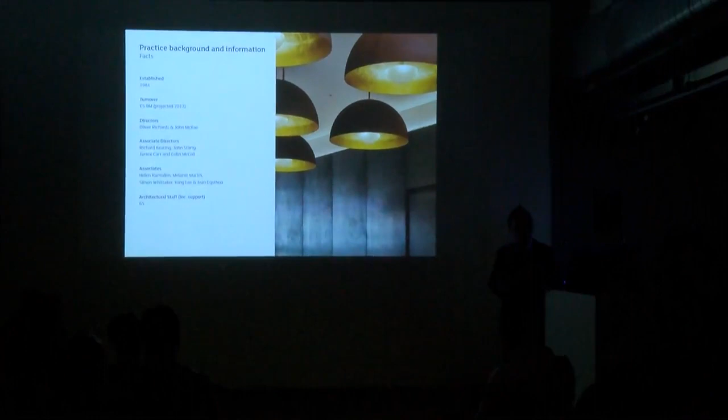Just to give you a bit of background as to who we are - we used to be called ORMS, initials of the founding director, but we rebranded about 3 years ago. We're up to about 65 in terms of size of the practice, which has gone up about 10% in the last 6 months. So we've been fairly busy lately.

In terms of us as a practice, our bottom line is that we create an architecture that listens. When we rebranded and rethought who we are and what we do, one thing that kept coming back was people - how we interact with people, the spaces we create for them, and how important it is as an architect to collaborate with anyone from local communities to the people who make things for you and help you achieve what you need. That's why we think innovation comes from asking the right questions and interacting with the right people.

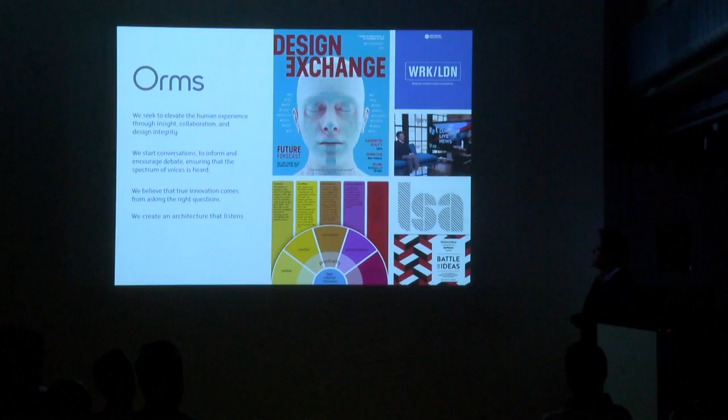As part of what we do as a practice, there are things like the magazine Design Exchange and Lighting magazine, where I sit on the curator's board. We also interact with the London School of Architecture, with feasibilities and research programs with the NLA, and this Saturday I'm doing Battle of Ideas down at the Barbican.

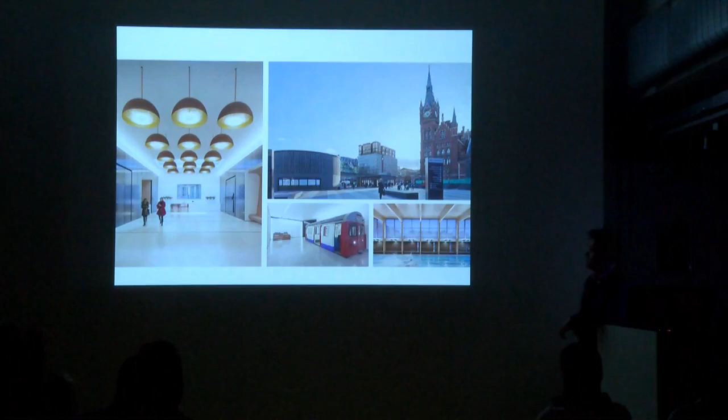As a practice, we work across a range of sectors. People always ask what sectors we specialize in - my retort is that we specialize in architecture, because architecture isn't just about workplace, hotels, or schools. It's about creating spaces, environments, and the infrastructure for people to inhabit buildings.

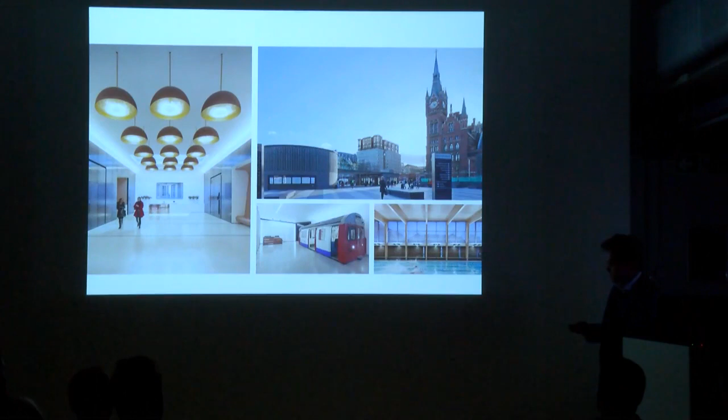So we do everything - this is workplace on the left-hand side, 1 and 2 Stephen Street. We're currently doing this hotel with the Standard, opposite King's Cross Station. And we do school projects too - we did quite a few for Uppingham School. I am slightly ashamed to say, this is a replica tube car in a reception in Aldgate, not the real thing - London Underground wouldn't give us one.

Alongside that, we also do new builds and refurbishment. Again, people ask what we specialize in, but it's not that practices just do new build or just do refurbishment. I think one key thing in refurbishment is that you need to understand the building - where it comes from, how it works - so that you can adapt it.

This one we're just finishing is called Number 1 New Oxford Street, with Centre Point at the far end. It's on the corner of New Oxford Street and High Holborn, finished about a month ago. The reason I put this slide in is the green glazed panels on the nose of the building and on these cores. We found, through our research, a number of letters between the architect and the Crown advisor, who was none other than Sir Giles Gilbert Scott.

Back in 1929, when this was designed, La Fontaine wanted to use green glazed panels. In the letter back from Sir Giles Gilbert Scott, he said it was too innovative for the late 20s, early 30s. So when we found that, the first thing we did was go straight to the planners and say we want to get rid of this precast and put glazed panels on the building. That idea of research and thoroughness is really important to what you do as an architect.

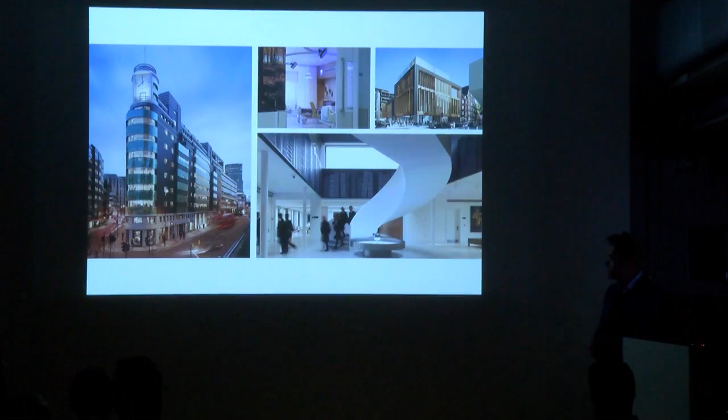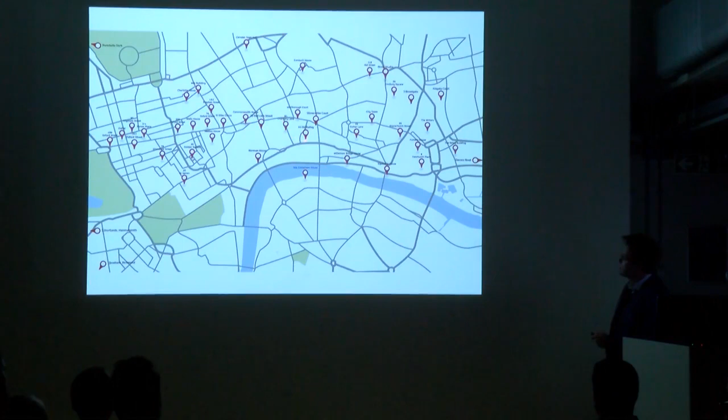We work a lot across London - the blue bit is the Thames. You can see we made one journey south of the river, but predominantly we're on the north side, going east-west and also down to Richmond. We do work outside London too, but what's fascinating about this slide, as we noticed in the office, is that it almost follows the new Crossrail line, straddling north and south of it as it runs through the centre of London.

So the project I'm going to speak to you about, as I said, is St Giles Circus.

What I'm going to do is give you an overview of the project, the concept and the thinking behind it. I'm then going to focus on three main things to give you an understanding of the construction sequence, because it is quite fascinating.

The facade, how we've developed with a cladding contractor this facade in particular, which has 9-meter high by 2.5-meter wide louvers that rotate and then slide apart. I'll show you the prototype, the video of the prototype.

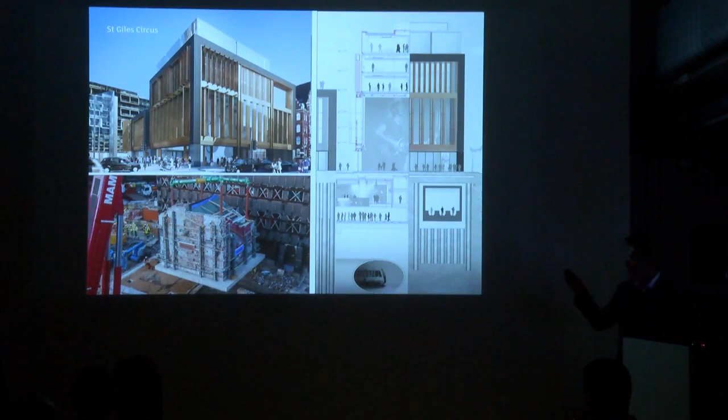And then down here, this is the 17th century smithy or forge that we have moved. This has just been moved back into its original position within 7 millimeters of where it started life. That literally, about 2 weeks ago, got moved back into its position.

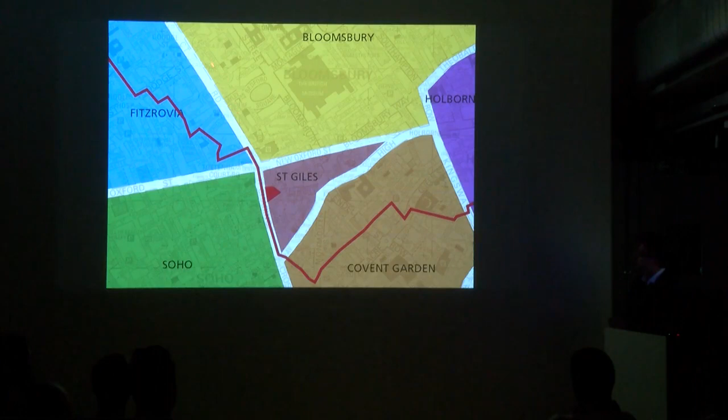So to set the scene for you, this is Oxford Street, which runs from the corner of St Giles all the way down to Marble Arch, then New Oxford Street, then Tottenham Court Road going north, and Charing Cross coming south. Interestingly, St Giles fits in this really interesting slot in between a number of different parishes or boroughs. So you have Fitzrovia to the north, Bloomsbury, and then you've got Covent Garden and Soho. This red line here is the boundary between Camden on this side and Westminster on this side.

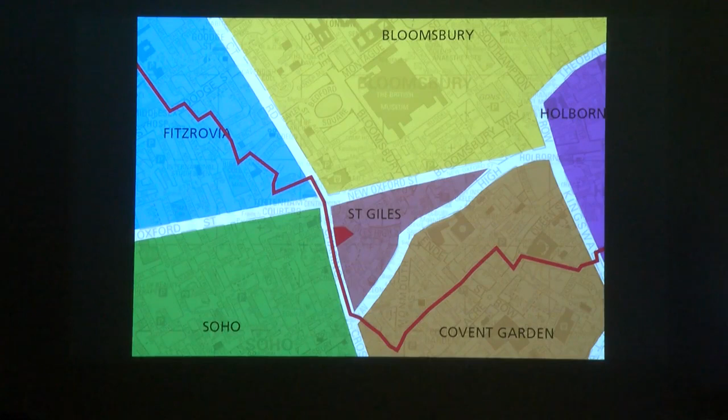Crossrail straddles basically the middle of that road. So it's quite interesting how you'll see how that has evolved quite recently. Just some of the key maps.

Now, interestingly for you to note is that up until Centrepoint arrived, which is this map here, there was always this really interesting termination of St Giles Circus, as it was called. You can see from this development map, this is St Giles Church here, and that sat within the grounds of the former St Giles Hospital. You can see the density of development that occurred in actually quite a quick time period.

And it became a very prominent node in that east-west, north-south connection. So interestingly, St Giles historically has always been one of those major points of interaction with London. If you look right back in time, Ackroyd did this really nice piece about how it was the main entrance and exit to the London fairs of its time. It has also been notorious in terms of it being squalors. It got cleared. It had light industry. It's got a real fascinating history.

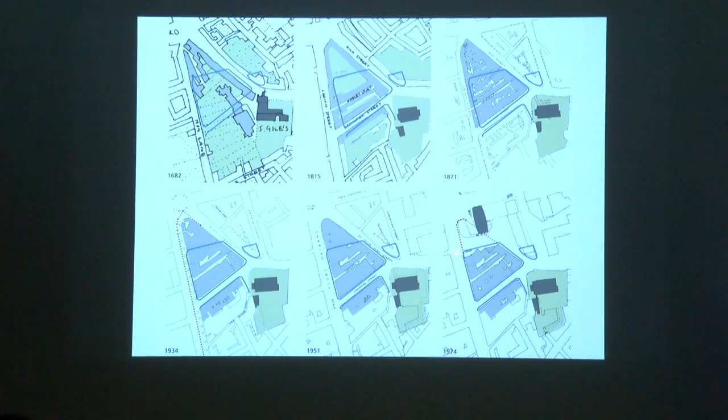And then when Centrepoint came along just before the 70s, that's the tower there, and then that's the L-shaped block with the road that used to run underneath. This part of the site got completely obliterated. You can see here, this was that round corner building that was St Giles Circus. That's the theatre that's on the corner of New Oxford Street and Tottenham Court Road. That's been replaced by essentially the podium of Centrepoint.

And you can see that the history, and when you come down to St Giles High Street and then on to Denmark Street, a number of these buildings still survive to date, and they are part of the site as we see it. So just to orientate yourself, that's Oxford Street there, Tottenham Court Road, Charing Cross coming down, and then New Oxford Street going off to the east. So Centrepoint, the main tower, is there, and then the L-shaped block, which used to have the road running underneath, which is now gone.

The grey bits are really to show you the areas that were cleared during the compulsory purchase under the Crossrail Act. So this is one of the major interchanges between east and west, and there's also a major intersection between that, the Northern Line and Central Line. The amount of people that will be arriving and exiting from this station is enormous, and you'll see a video in a few minutes about how that works.

We're obviously surrounded by some Grade 2 listed buildings, which are these. The Grade 1 listed building is what's termed as St Giles in the Fields. Our site that I'm going to focus on is on the north side of Denmark Street. And then there are some buildings on the south side, which Ian Chalk, who actually was taught in Westminster, is carrying out those works. So we agreed to split those. He used to work with us, so he set up on his own. He's doing the south side of Denmark Street, but we're going to focus tonight on the north side.

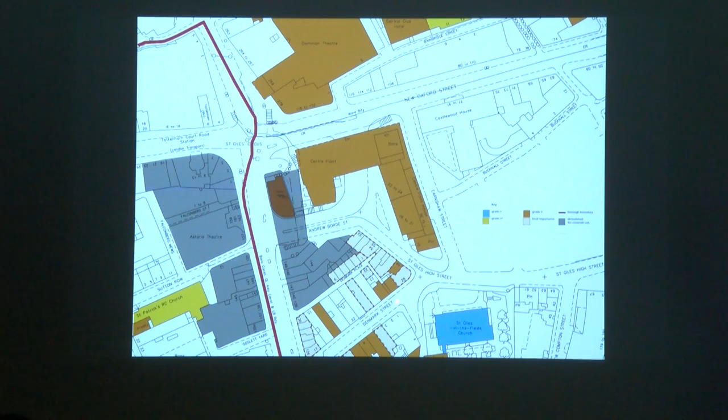Some of the sensitivity around this site focuses on Denmark Street, often referred to as Tin Pan Alley. Since around 1900-1910, Tin Pan Alley became synonymous with the music industry. There used to be a number of music writers and publishers on the street, and people would turn up, knock on the door, and play their music. That music would then be brought in and placed with artists.

That evolved into a former club in this building, which was the 12 Bar. It was a very important music venue in that a number of artists had their first gigs here. People like Elton John and David Bowie played here, and even Ed Sheeran and Adele did their first ever concerts in this venue.

Along this part of the street, there are a number of music shops selling guitars, keyboards, and the like. On the south side, there's an equally interesting history - the Sex Pistols recorded one of their first ever albums on the south side of the street. This whole area is synonymous with music.

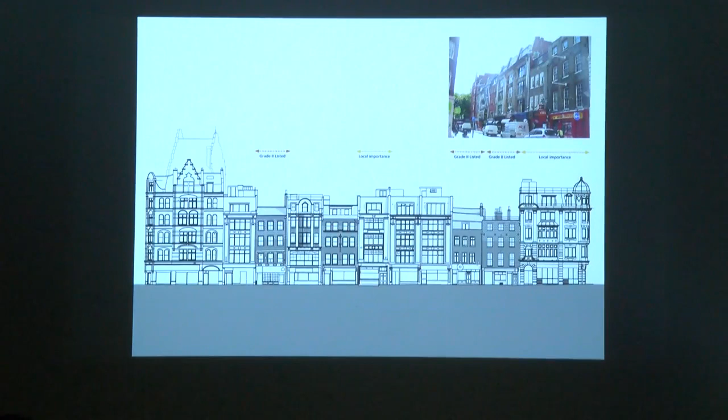We've been accused of a number of things, one of them being gentrification. Interestingly, when music came along, it actually displaced light industry, so you could say that was the first iteration of gentrification. Technology has changed the music industry so much that apart from a few guitar shops left on that street, there's little else of the music industry there - they're all scattered throughout the UK. So could our scheme be part of knitting that back together?

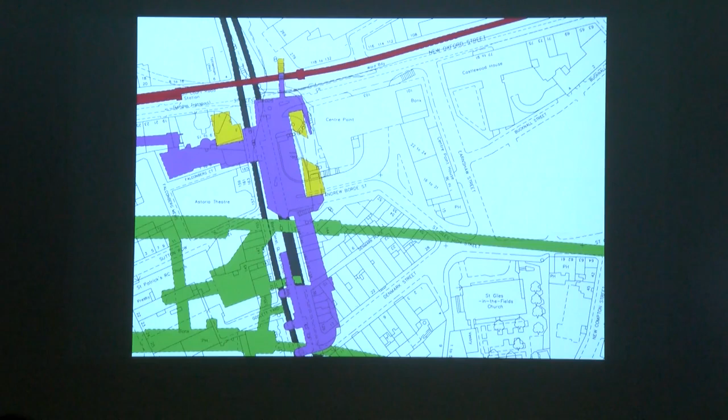This diagram is quite interesting. The purple is the Northern Line escalator - the escalator box sits here, connected to the Northern Line. The green is the new Crossrail tunnel, which runs right through our site. Some of the constraints we had were Crossrail on this side, and the Northern Line escalator box coming up just 2 meters below the corner of our site on the Charing Cross, or former Andrew Borde Street, frontage.

So why has this been such a big thing, and why is this site so prominent? I mentioned Crossrail earlier - its tentacles reach far east and far west. The amazing thing is you'll be able to get east to west from the center of town within 10 minutes. Canary Wharf to Tottenham Court Road will be around 10 minutes, which is phenomenally quick. It suddenly changes your interaction with culture, with music, with food - you'll just leave your office and be right in the heart of the centre of London.

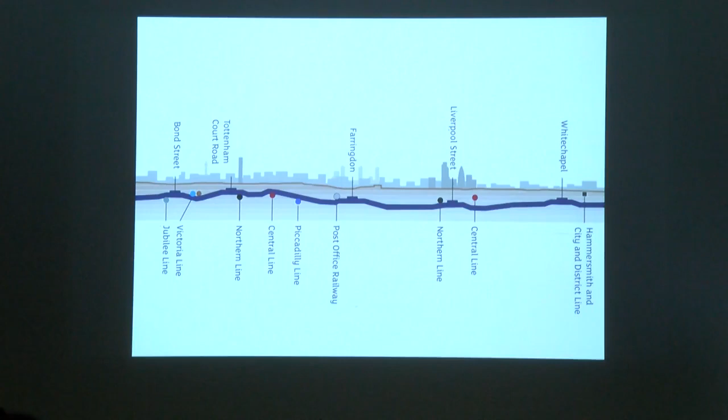Tottenham Court Road is one of the only stations planned to have Crossrail 2 intersecting with it as well. Linking back historically to it being one of the main entrances and exits to the City of London, it will have the Northern Line, Central Line, Crossrail, and possibly Crossrail 2 if that ever happens.

So what did we want to do with the site? We were contacted back in 2009 - to give you a flavour of the timescale, this is due to finish Q1 2020. So this project is about 11 years from getting it to actually delivering it. Take your mind back to 2009 and into the beginning of 2010.

The idea was, how do we create a really interesting brand that could be a welcome to London? It could offer a series of things that London either doesn't have or are much further away from being right in the centre. We looked at everything from Tate Modern to bringing the kind of technology that Apple may have. The idea was, could we use technology, could we use screens, to help create a brand that was ever changing?

Laced in with that was the idea that could we create a venue, crossing between music venues, event venues, or what's termed mixed use. If you look at the music venues, they're dotted around the outside. Event venues come in nearer the centre, but mixed-use developments again are not in the heart of that space.

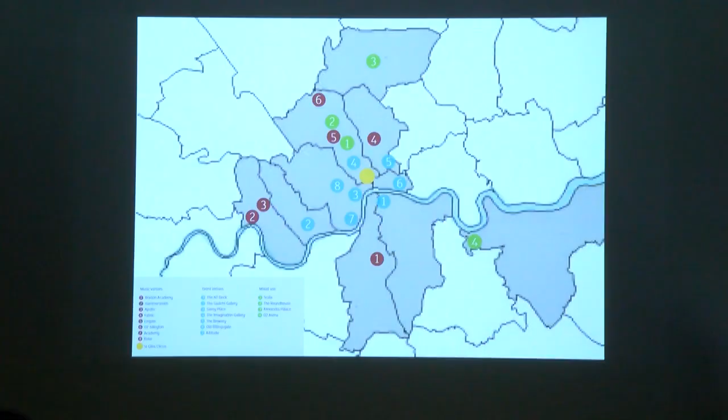So the thinking was, could we address some of the issues going on at the time, which was a number of live music venues being closed down. You may have seen the Music Venues Trust report about the closure of venues, touching on licensing, business rates, and the ability to simply run a venue, because a small venue invariably gets tied up. If you have a concert in the evening, it might be tied up the whole day, and possibly the day after, until it's cleared out. So the turnaround time is quite tricky.

There's been the loss of Turnmills, the Astoria, which is just on the other side of the road. And what you're also seeing is a rationalization of a number of other music venues into becoming slightly larger venues, such as those run by O2.

So coming back to the site, and the considerations we had. Just to place you, Denmark Street being Tin Pan Alley, there's a number of new developments. AHMM are doing this one just on the other side of Charing Cross Road, which is going to be an above ground office building, but there's also going to be a theatre and a little piazza here.

So coming out the new glass entrance box, the consideration was that St Giles High Street is now going to be fully pedestrianised, so no longer will there be vehicles running underneath that tower. This is going to have retail on this left-hand leg. Buses are going to be diverted either down Denmark Street or along New Oxford Street.

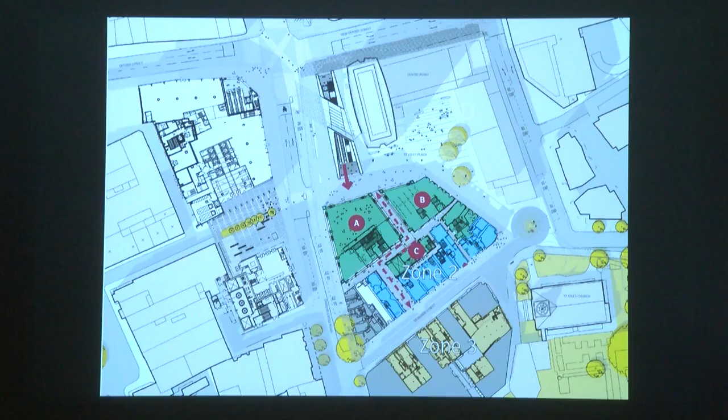The blue demarcates where all of the existing buildings have been retained, being refurbished, some extended. One of the key things in positioning this building was that there's a new alleyway between buildings A and B that then picks up Denmark Place. The back of this building is on the line of the former frontages removed by Crossrail. And then we're cutting through one of the buildings to create this arcade that links Denmark Street back with the main entrance from Crossrail.

So how does this actually work? This is the Crossrail box that faces towards Covent Garden. You'll see in a second, we're building up to 5 stories below ground, so plant is going to be further down the building. That's the Crossrail tunnel that runs diagonally through the site, so we're actually building on top of and around and holding down the new Crossrail tunnel.

And in this particular space, we're creating a multi-purpose venue. It can be used for anything from product launches, for conferences, but also for concerts and gigs. The idea is that this can hold up to 2,000 people in gig mode, which is a replacement for the Astoria, which was on the other side of the street.

Key to this is that this has what's termed a box-in-box construction. The outer line is the concrete slab and frame, and this inner line is an isolated structure, so that the sound and reverberation going out as well as coming in can be minimized to be what's termed a world-class venue.

Now the key to all of this, and a key to this space here, has been the use of LED technology. We're going to be lining both of those spaces with an LED skin, and the idea is that we'll be curating the content so you can literally change from product launch to gig mode into music mode in a matter of hours, not days.

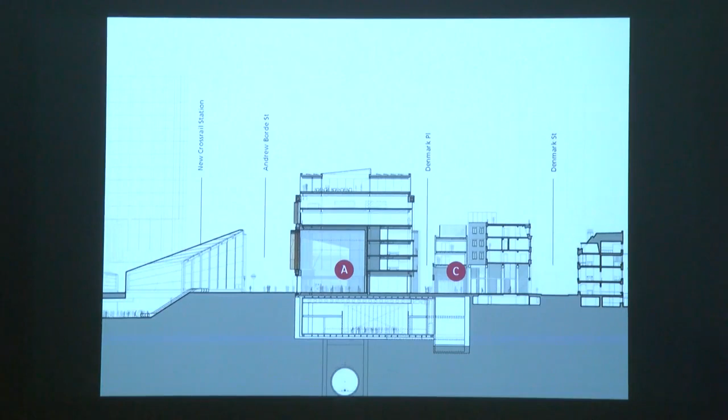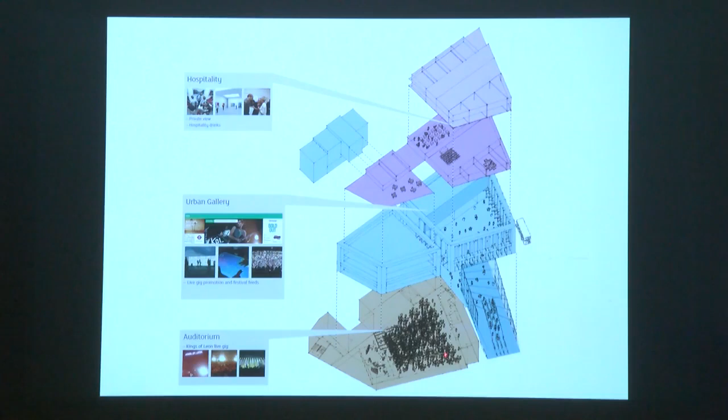On top of the building we have conference facilities and retail. So very roughly, the building is split into three zones. One is about hospitality, with a bar linking into a restaurant and conference facility. We then have the urban gallery on Building A, and Building B is a mixture of office space and a bit of retail. Below ground is what we've called the auditorium, the multi-purpose use space that can be changed very quickly.

So just looking down on that urban gallery, the idea is to bring people into this space that is ever changing. A number of people have said, oh, this is like Piccadilly Circus and the screens there. It absolutely is not like Piccadilly Circus. Piccadilly Circus is a static engagement—once you've seen it and what's on the screens, that's it. The idea here is that you can create a totally immersive experience.

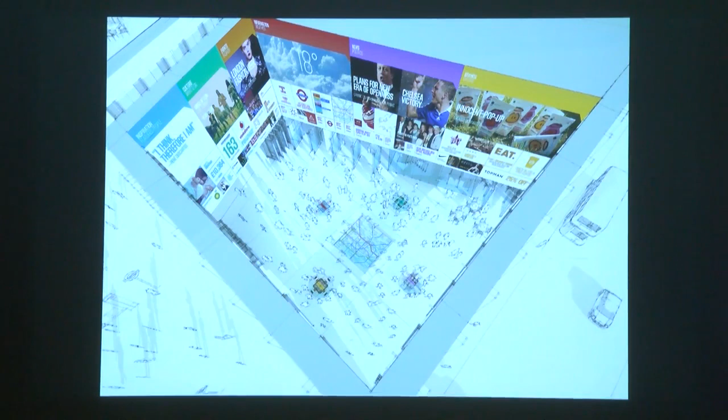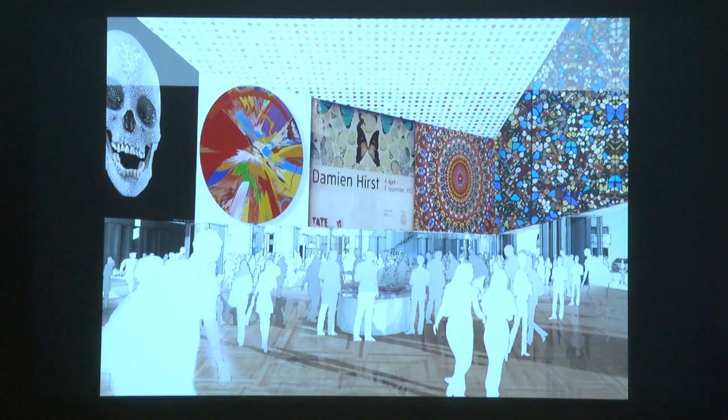It could be anything from the PlayStation Championships held in here, with the whole course around you and above you, completely immersive, to a pre-gig where somebody like Ed Sheeran performs before going down into the underground venue. The idea is that this is a space you come back to time and time again—it could be linking up with the Tate to doing the next Damien Hirst display, through to displaying Denmark Street.

We really like this idea that on this side of the site, you have technology and how technology could help inform the tradition of music. On the other side of the site, you have the traditional music, and you could engage with the technology if you want to. And if you don't want to, just keep away from either—we're quite happy for you to do that.

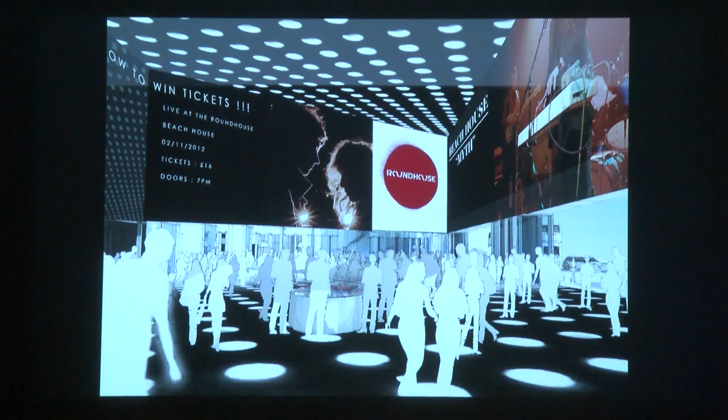And then in the evening, what's been discussed is that we could curate what is happening in the area or nearby in other venues, so it's a go-to place to find out where you might then carry on to in the evening itself. Down below, some of the ideas involve this LED skin, where we're literally creating a volume which you can then change to anything you want it to.

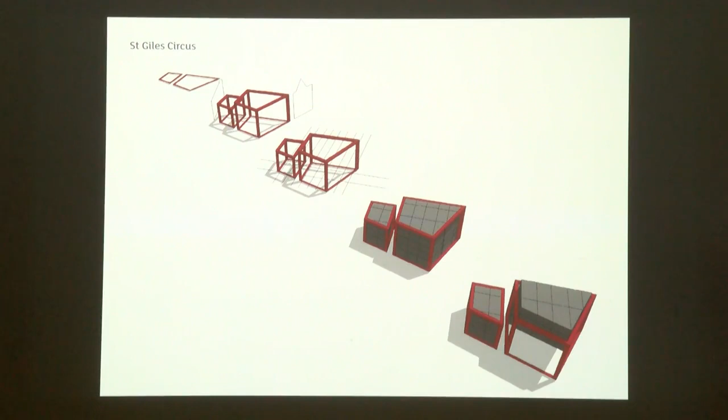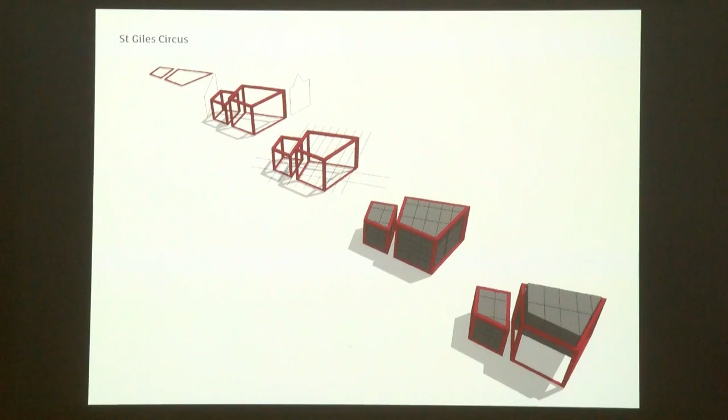So I'm going to focus on the two buildings above ground first, and then we'll move on to the smithy. The concept for the two new buildings, A and B, was based on the idea of the cabinet of curiosities—the red frame, which won't actually be red but is shown that way diagrammatically, holds two volumes that open and close to reveal different things at different times. When you open it, you discover something new, then go around to the other side and open up something else, engaging with it in many different ways.

So the first part we'll talk about is what we call, or what's been referred to as, the now building.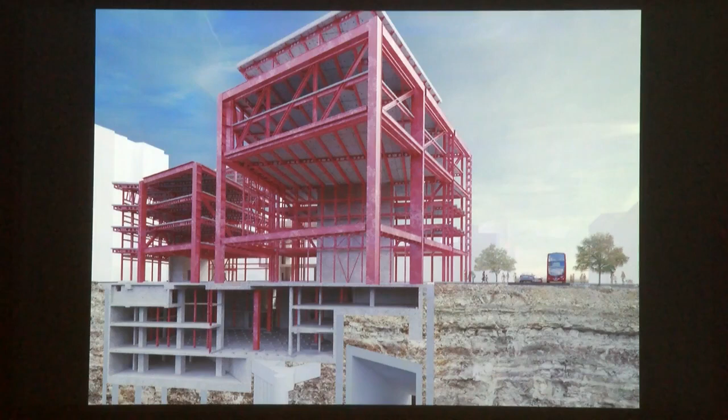So I'm going to try and see if this is going to work. Oh, it is, perfect. Skanska are our main contractor, and they put together this really fascinating video which shows you the main piling that happens, and this is the sequence.

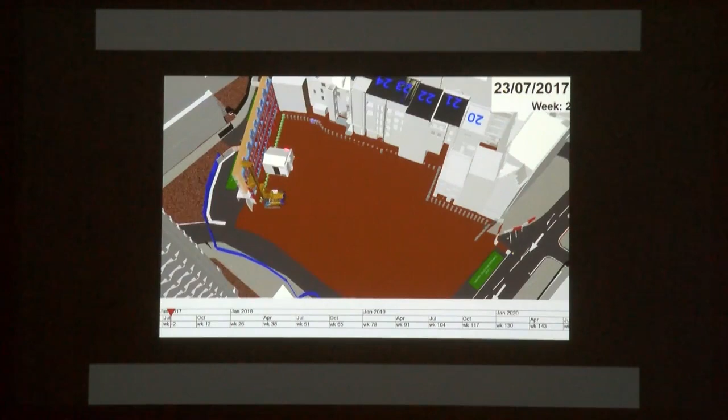That's the smithy, and I'll show you it being moved. It was moved out of the way so that this piling could happen along the perimeter of the site, and this is the timeline through to the first quarter 2020.

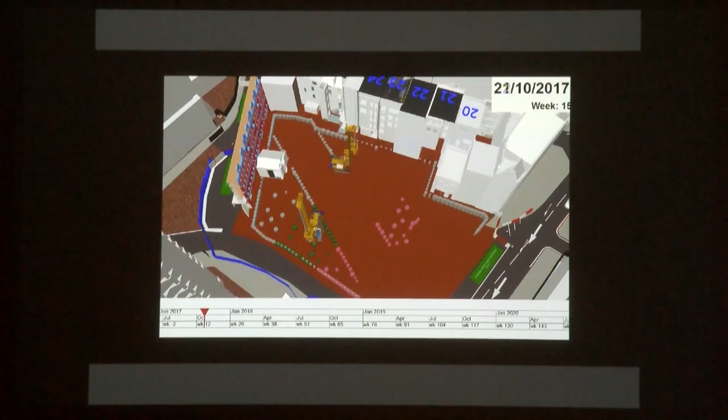So this diagonal that's starting to appear is either side of the Crossrail line. Those piles are going to get driven all the way down either side of Crossrail. Now you can see that once the ground floor slab is in, you can start building up as well as excavating and going down.

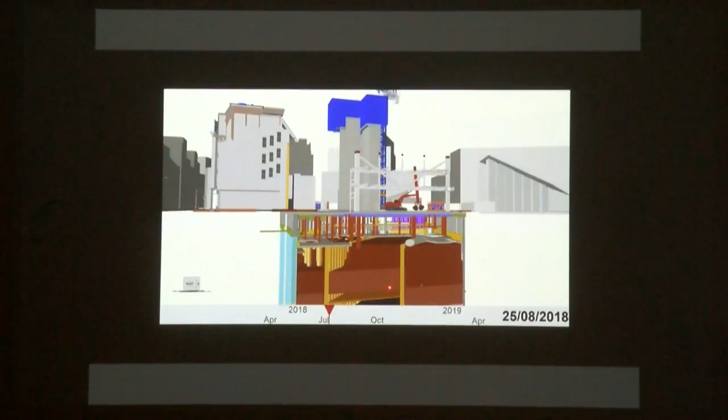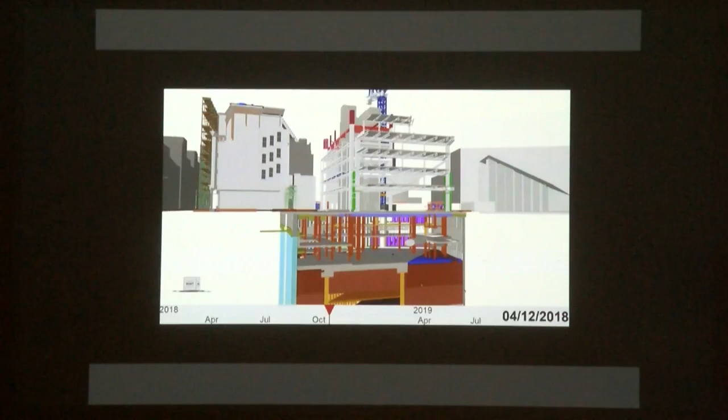And then you'll see there's a really fascinating adit beam which is about to come up here. What that's basically doing is creating a platform that holds the Crossrail line down. The maximum movement we're allowed at any one point on Crossrail is 5 millimeters, so there are sensors and surveying equipment to make sure we never cross that.

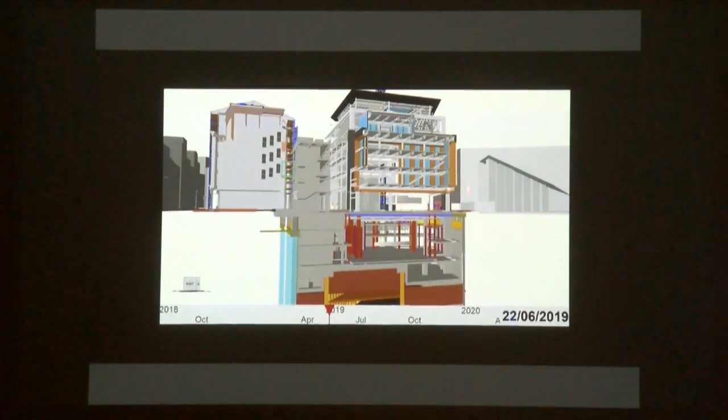So you can then start to see how some of the cladding is starting to go on. In a minute this timeline will go back a little bit, but what you're starting to see is all of this cladding has been pre-designed, pre-manufactured, and is literally coming on. The building is finishing, and we are literally just finishing the below ground at exactly the same time.

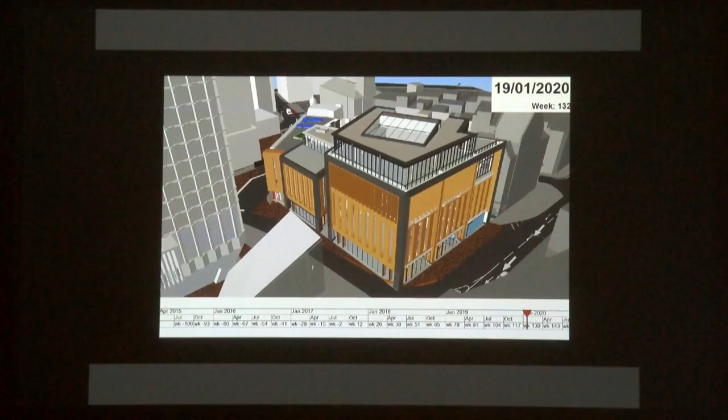So there's a huge amount of logistics that go into how a building of this scale and complexity would actually work. One of the key areas within this is that Northern Line escalator box. That's our ground floor, and this is how we sort of develop the facade.

So the idea is the frame of the Curiosity box, and then this glass building that sort of slots in behind it, so that behind these louvers there's a sense of an opening and closing and things ever changing.

Having tendered this to 4 different cladding contractors, we settled on a company called Frener and Reifer, who are based in northern Italy, just by South Tyrol. The reason they ended up being our preferred contractor was that they specialize in moving facades.

These fins are literally going to be open and closed a number of times during the day, so we've got to get this right. This is not a building we want 400,000 people to see in stuck open mode or stuck closed mode.

The first stage of design was that they built and worked up a prototype model for how these fins would work. This is actually the frame of one of those fins, and there are two mechanisms within here: a spindle, and also a drive at the base. It's based on mechanics rather than hydraulics, because mechanics is a tried and tested method, whereas hydraulics is still a little bit temperamental.

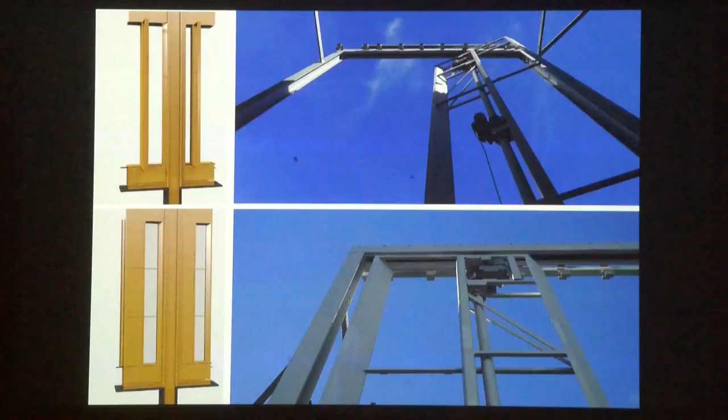The original concept was that we had explored these being in bronze. Interestingly, this was developed around the time Bloomberg was being built, and so we found out a huge amount about the bronze material and how that works.

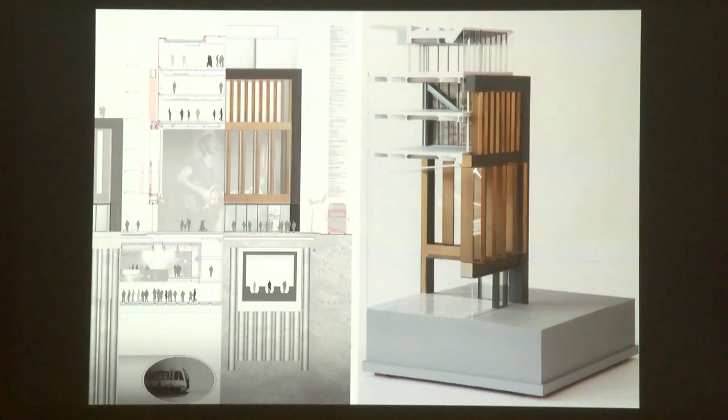That bronze material on the Bloomberg building is by a company called Kikukawa, based in Japan. The louvers on that building have to be waxed at least 3 times a year by a team of people, and the reason for that is if you don't maintain it, it will start to oxidize, some of it will green, and some will discolor in a different way.

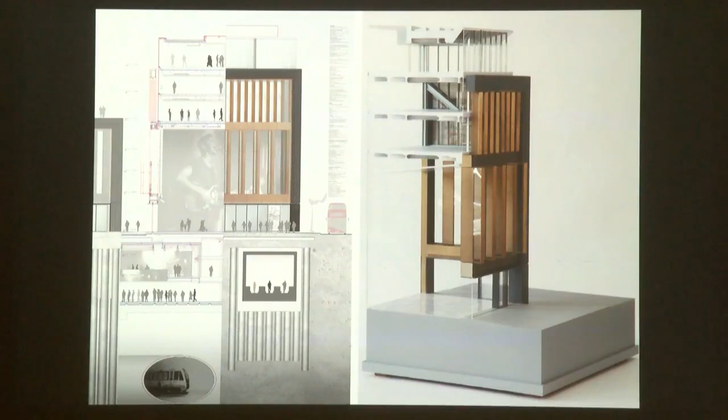The other alternative was that we could lacquer it, but if lacquer gets scratched, it then starts oxidizing in a different way. So what happened was Frener and Reifer came up with a material which is titanium-coated stainless steel.

There were two benefits to this. One was that you didn't have to maintain and lacquer or wax it over time. The second thing, which we only found out about a year ago, is that titanium stainless steel also eats pollution, which will help that localized environment, especially in that corner of the site by Charing Cross Road.

So we did a trip to Berlin to see this building, which had been up for 3 years, had never really been cleaned, and had been next to a building site. The reason we did this was to see how the material had changed over time, how it interacted with the street, how dirty it got, how folds work together, how you can cut things out of this material, and really understand what we could do with it.

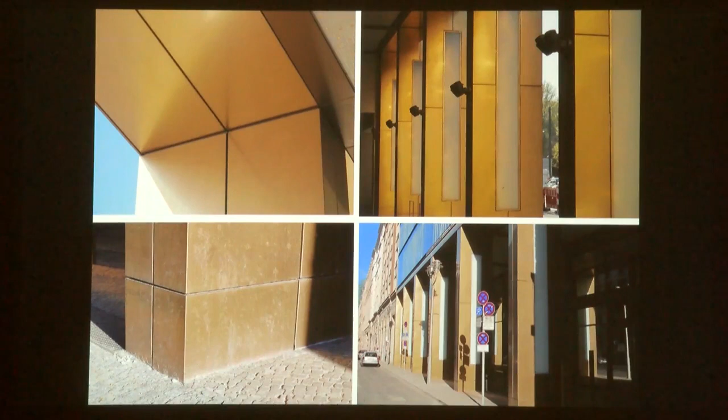Because we had to, not in any particularly difficult way, convince the planners that this was the right material to use.

So Frener and Reifer have then been working up how those fins, how the facades, the joints in the facades, getting the hairline in the stainless steel all in the right direction so it all looks as though it's wrapped as one panel underneath. They've been working very closely with us.

These are just some of the mechanisms in place for those louvers to rotate and then slide back — the movement and integration of that mechanism with the steelwork.

This steel has had to be modified in its design so that we could create all these little housings for the drives and for the cables to run through. Some of these panels have to be removable for maintenance purposes, while still keeping the really clean, fine lines that we've got on the building itself.

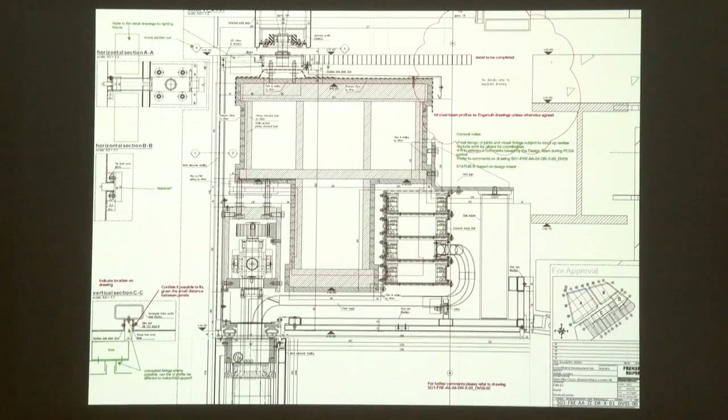There's a huge amount of technical consideration to get to that clean and crisp look. One key consideration has been how this facade, especially this lower part, operates in closed or shut mode, then rotates and starts to open up to reveal the gallery, so that when the gallery is displaying things, you can either be in it or be on the street looking into it.

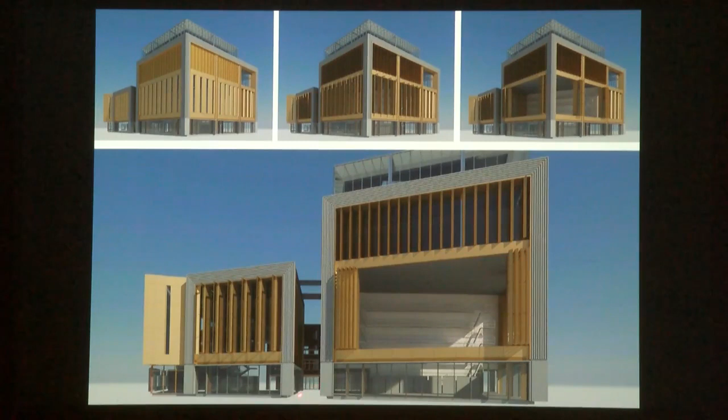And then coming back round, as you come out of the Crossrail exit, the ground floor facade opens up, and you literally see four stories of the inside of a building. This is the alleyway, the new alleyway created down to Denmark Place.

They've done an amazing job. They're now into the next level of detail, which is to work up the final control sample of that blade. So just to complete the picture before we move on to the smithy...

There is a roof terrace here, and the bar is just tucked behind, and it links into Building A, which then has the restaurant at the very top of the building.

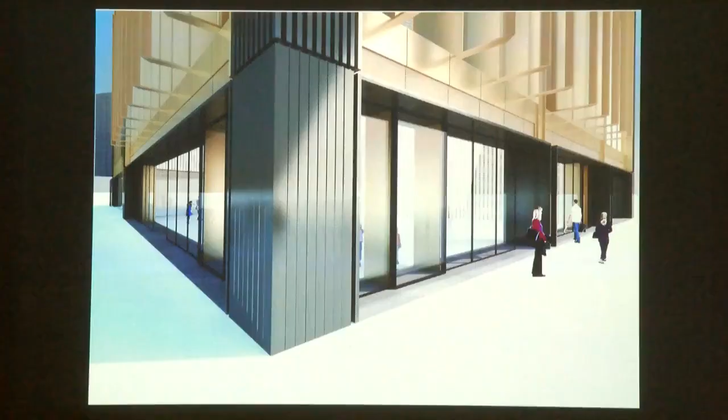As you come down to ground, we're going to walk around the side and into Denmark Place. One of the key things we did was ensure none of the titanium-coated stainless steel on the outside hits the ground. That was following that visit to Berlin, where the material is fine, but this corner is going to get an absolute hammering. So we changed this to black granite.

And then we've got these black granite sleeves, and all these doors - these are pocket sliders that sit in fixed positions so that you'll be able to walk across the corner or into the building very easily. And then these perforations are for air in to condition the space.

When you get round the corner, this is looking down from the corner of Charing Cross Road down Denmark Place. The footprint of the back of Building A is on the line of the former buildings that used to be there before Crossrail removed them. And that's the alleyway that links you back down to Tottenham Court Road.

As I mentioned, Denmark Street, or Tin Pan Alley, has been synonymous with music throughout history. We faced quite a lot of accusations, many of which were completely unfounded. The primary reason was that a number of people didn't want to see the former 12 Bar or the music shops leave. So our planning permission actually has a clause that says we must have music-related uses on Denmark Street - that could be anything from recording to selling records to having guitar shops.

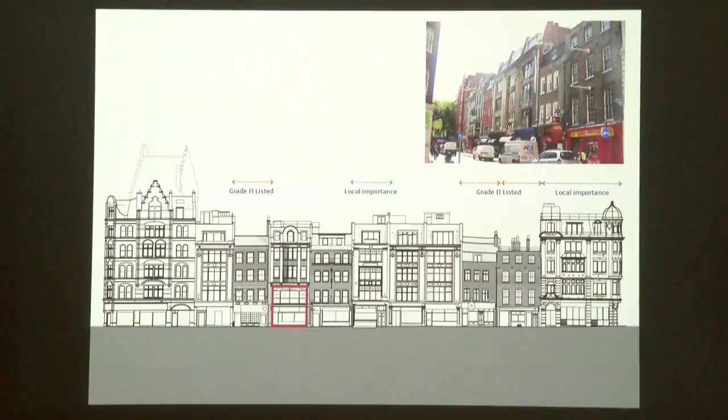So we've had everything from, we've been in the Evening Standard, we've been in the Guardian, we've been in the Telegraph, we've had squatters. I've been on London Live, if you don't know what that is, it's a TV station, and also BBC Radio London, because we were being accused of all sorts of things.

Because, yes, the music industry has died in many ways in Tin Pan Alley, but the whole challenge here was, how can we use technology to reinvigorate it? Because technology has been seen as one of the main causes of the death of music.

So what happened was that on the back of the positive press we were getting, the GLA got in contact with us and said, can we come and see you? We need to understand what you are doing, because we keep hearing that you're doing lots of very nasty things.

Paul Broadhurst from the GLA came to see us, and within 10 minutes of starting the presentation he said, but you're not doing any of the things you're being alleged to do. And we said, no, we're actually trying to help reinvigorate music, bring it back to life. Could it be the home of British music?

This is what led him to introduce us to the Music Venues Trust and Sound Diplomacy, who have been in the background looking at the nighttime economy. There's a night czar, Amy Lamé, who has become London's first. In Amsterdam it's called the Nightmayor, but interestingly they dropped that and called it the Night Czar here. She has been looking out for the nighttime economy because it is a massive thing.

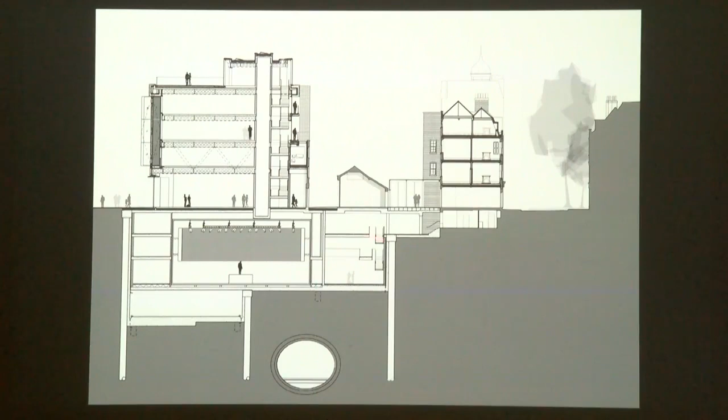Interestingly, in stripping out some of the finishes here, how no one was killed in that building is quite extraordinary, because what we found was that the staircase coming down from the mezzanine wasn't actually load-bearing onto anything whatsoever. So it was quite interesting.

What the GLA said to us was, could we create a below-ground grassroots music venue below what was the 12 Bar? One of the key criteria the GLA looks at is that grassroots music venues are anything from an audience of about 100 up to about 400 or 500. So they're small venues where live music can be played.

What we said to them was, we think we can create one, but in order to do it there was a real issue and consideration that the smithy, if we were to build a basement underneath and below it, might actually fall into a thousand sticks, because it's literally quite a delicate structure.

So in conjunction with Historic England, we did a whole analysis of all the buildings, and we agreed to remove number 23, which was in between the two original buildings. We removed that, and as part of it we framed and removed this building whilst we formed the basement or the ground floor slab, then reinstated it so the footprint of the former 12 Bar could be restored, and we could put a live grassroots music venue below ground.

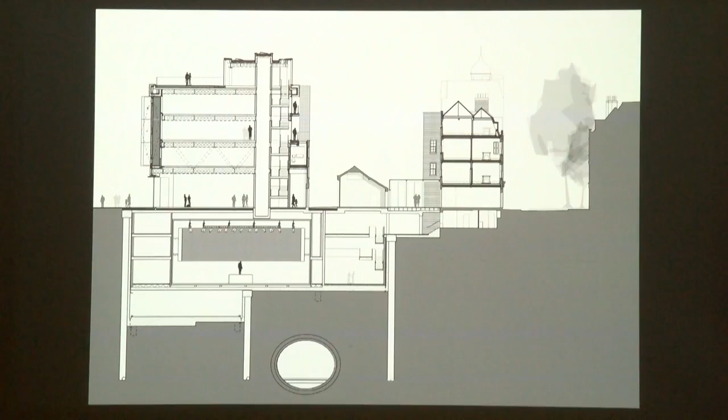The interesting thing about that is that the volume creating the music venue then backs onto the 2,000 person gig venue. So they could interconnect, or they could be kept completely separate.

Ahead of moving the smithy—this building here on Denmark Place—we had photographic and laser surveys done of the original buildings, including point cloud surveys overlaid with photographs to record where everything was before we actually moved it.

The process of moving this building: we removed the infill building, then built a slab underneath the existing building with the building in situ, doing that in two halves. We then had to frame the inside and outside of the walls, and then very simply we hired a crane and moved it off to one part of the site.

Step 5 was to create the first run of piles either side of where the smithy would return to. That slab we added is actually the final slab that rests on top of these pile caps. We've literally just moved it back to this position, and the contractor is now starting to build that ground floor slab so we can excavate underneath to form the music venue.

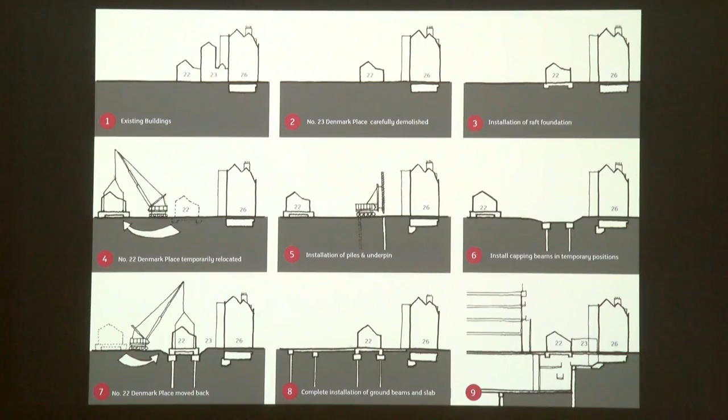So it's all easy stuff. It's all easy stuff. So this is when it was moved.

What you can see here is these steel posts either side of the original walls. There are ties that went through the mortar joints and the brickwork to tie and clamp the whole thing together. This was moved by one of the contractors.

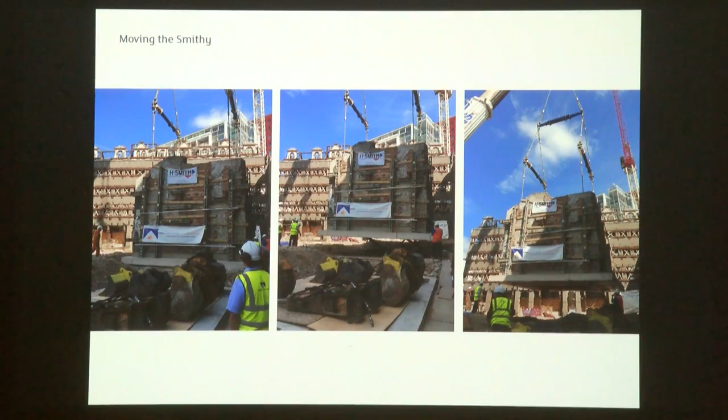Very recently, only a couple of weeks ago, the second stage was to move it back from its temporary position, back across, with the slab onto its now original home with its new ground floor slab. It's been repositioned within 7 millimeters of where it started life—an incredibly delicate operation that took about 4 hours of stopping and starting before it moved across.

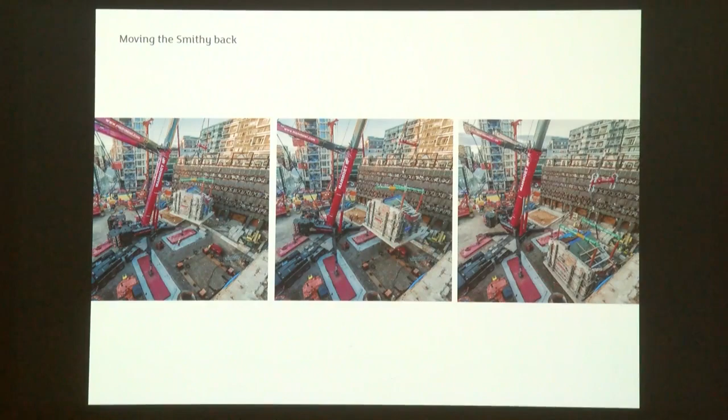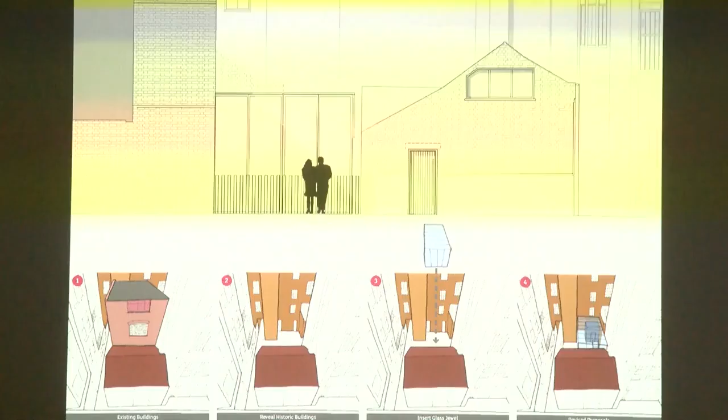So all of that to create that grassroots music venue below ground. Just to complete the picture, that's the elevation of the smithy. We're putting a glass link set back to the original infill. Back in about 1750, an infill was added that left a little courtyard within the alleyway. In discussion with Historic England, we're putting back a glass box so you can read the two listed buildings completely independently in a courtyard setting—which used to be the courtyard for the forge itself.

For the final couple of slides, then I'll leave you with a 2-minute overview of the scheme. This is an extract from the BIM model we've got for the building—we're doing all of the coordination: structure, M&E, architecture, cladding, the whole lot. This cut-through shows the escalator box coming up here.

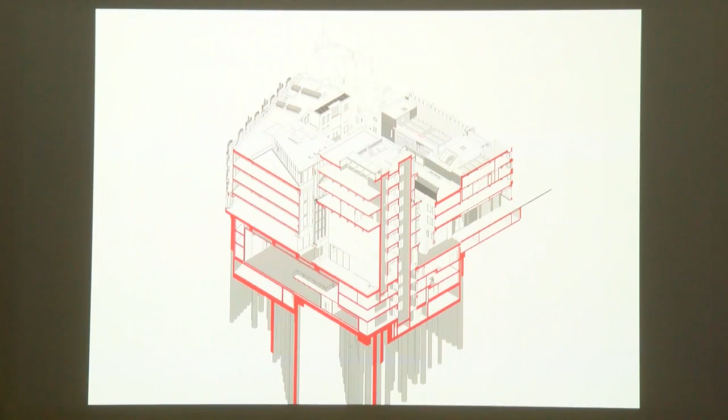That's the underground music venue, and that's the gallery, the space between them. This is really about connecting the old buildings to the new buildings all the way through and around that site, to create something that's both about daytime and nighttime, and how we contribute to the nighttime economy.

The idea is that at night it will have a very different look and feel. It may or may not be open like this depending on the format. That's where the hotel is, with conference and restaurant facilities. Then this little glass box at the very top has a 360 view of London, apart from where Centre Point gets in the way.

So just to leave you with this video.

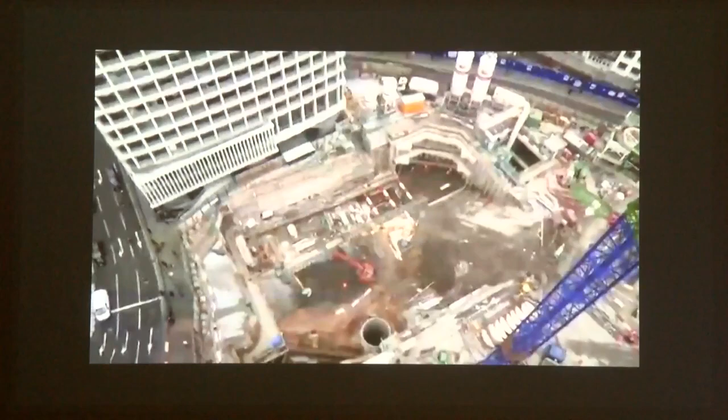The new station is designed for 200,000 passengers a day, but even that may not be big enough. We were talking 4 or 5 years ago about 4 million passengers a day in 2016. Guess what? Last year, back in 2010, it was already 4 million passengers a day. So now we're thinking 5 million passengers a day.